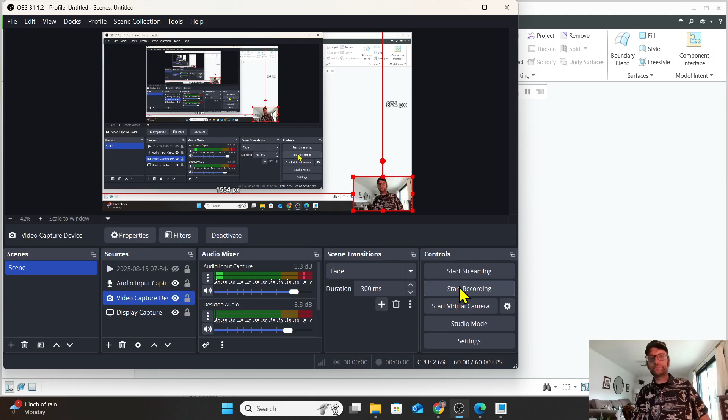All right, here we go. Exercise 3 has 2 labs associated with it. Let's take a look at those real quick. I'm going to give you help with one. The other one I'm going to leave up to you, and I'm going to probably go ahead and choose what I think is the tougher of the two. So let's take a look at those.

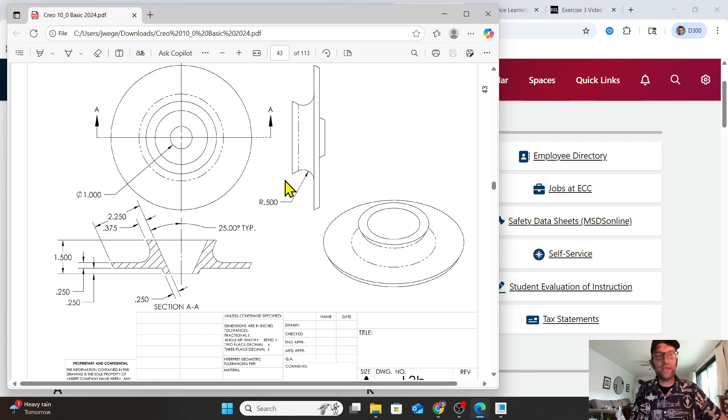So on page 42 of your book, we have L3 and then L3B. L3B, looking at it, it's really more practice on the revolve tool. So we get some more practice with sketching, refining our skills a little bit with that. But just remember with this one that you're going to sketch this section right here. Okay, we're going to get that really nice.

But first, before we start that out, let's go ahead and put an axis in here, a center line in here, and set those dimensions off of there that need to be set off of there. And then once we're done with this, then we're going to revolve that sketch around that axis, and we'll end up with that part.

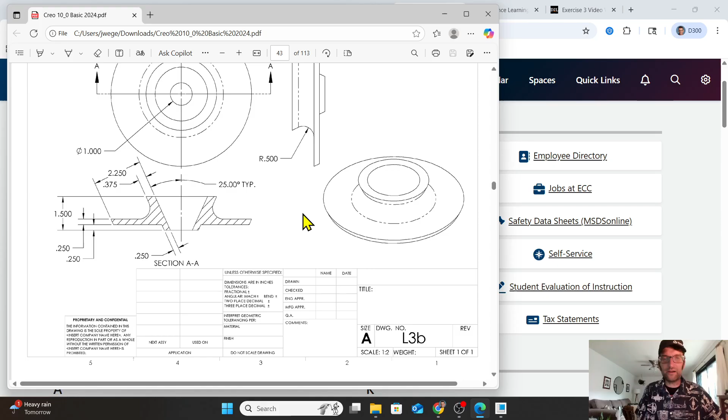All right, let's take a look at L3. A little bit harder of the two. We talked about some additional technical drawing things. We talked about the idea of multi-view drawings. We have one here. We have our most descriptive view up on the front.

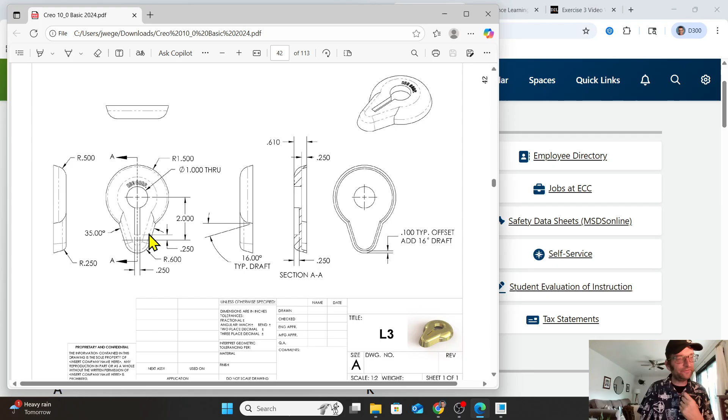Then we have the top projection projected from here up to show the top, here to the left to show the left side, here to the right to show the right side, and then the associated information. So let's dig into it a little bit. We have this primary view. Let's look at this. We have a radius of 1.5. We have a radius of 0.6 down here.

And I know this one is a little bit more crowded than some of the other ones, so we're walking through how to set this up. We have centers that are 2 inches apart for each of those radii. We have a 35-degree angle called out, which is going to be from here to here. Okay, because we have an arrow here, the leader there, and we have one there that's showing us that 35-degree angle.

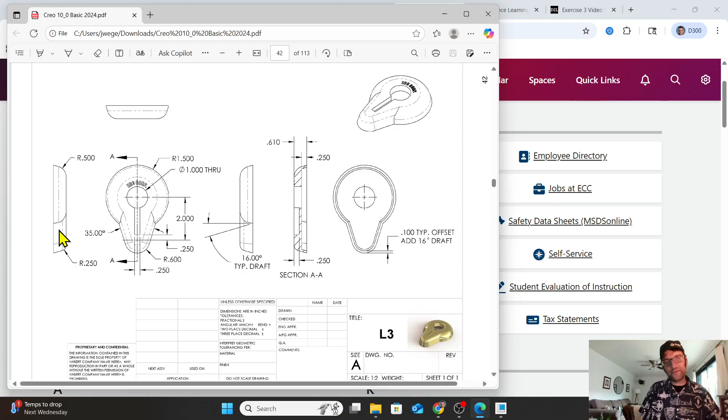And then when we look at the side, on the left side view, we see that we have some rounds. Okay, a half-inch round and a quarter-inch round. And if we look at this isometric view up here, we see that half-inch round. On that top edge of the part, we see that quarter-inch round here. And let's keep working our way around.

So on the right side view, we see a 16-degree typical draft called out. And that is showing us that there is an angle to this part that runs all the way around it. And we can see it when we go here. We see there's 2 steps in the side. There's the round 1/4 of an inch. This is that 16-degree of draft. Here it is right here, below where that round starts. So it goes all the way around.

Now coming over here, we see something new. We see the section AA. We also saw something a little weird on this primary view where we see a couple arrows. We see direction of an arrow, and then we see some letters associated with that. See how those match up? We have A, and then A, and we have section AA.

With section view, what it is, section view is where we choose a line. That's arbitrary. It's up to you to put it where you want it to be. And in this case, it is running vertically through the center of this part. And then that line we choose becomes a cut line. So what we're showing in the sectional view is that part cut right along that line, cut in half.

And when we cut a part in half, we're able to see the difference between what's solid and what is open. So solid and open is going to be shown by hatching here. That's going to be our solid. That's going to be the part of the part. So the metal of the part, if this was made out of brass, like it shows in the picture, this would be brass here.

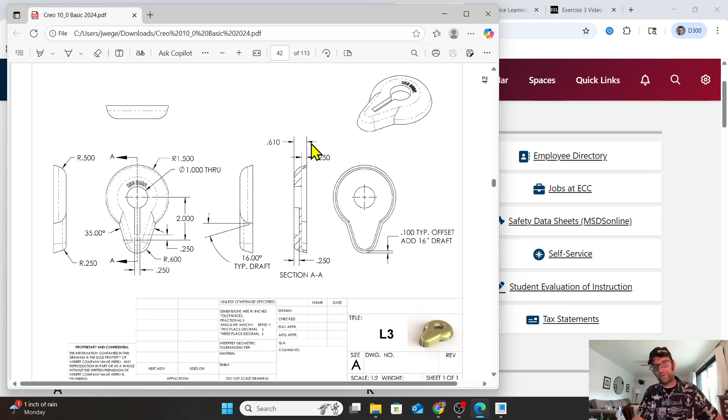And then we also see that pass-through hole, which is called out over here, 1 inch. Goes all the way through the part. And then we also see this little keyway, which is right here, shown on the top view, that primary view there, right there.

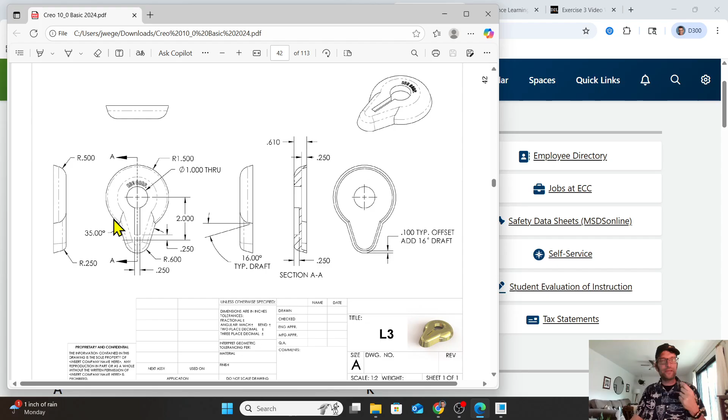All right, so let's work on this. We're going to start right here. We have 2 inches between centers, a radius of 0.6, a radius of 1.5, an angle of 35 degrees. Let's get into Creo and let's see what we can do.

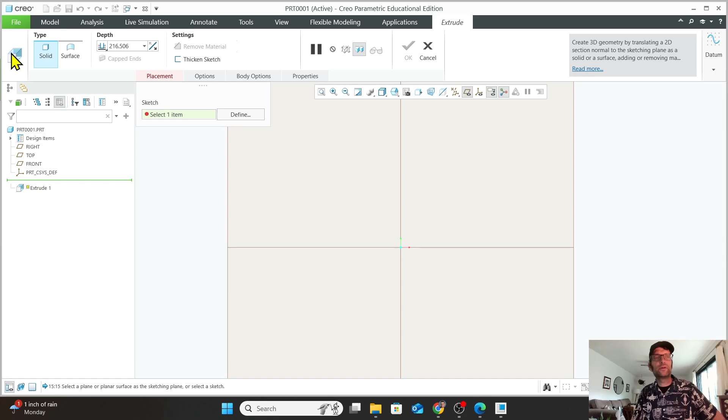All right, so we have a new part started up. Let's go ahead and just go right for an extrude. Okay. And we're going to cancel out of there. Let's go for an extrude. We don't have anything there yet, so let's go ahead and start with a sketch. Go to the front, click on that sketch, and let's get to drawing here.

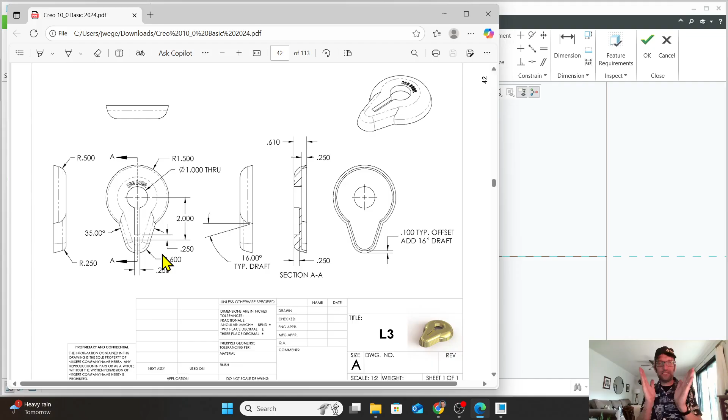All right, so first thing we need, let's get a center line in there, because we're looking at an angle that we've got to set up there. So let's just mirror one line to the other side, because the part is symmetrical one side to the other. And let's draw that line, making sure that it doesn't lock to anything else quite yet. There we go. Center click to end.

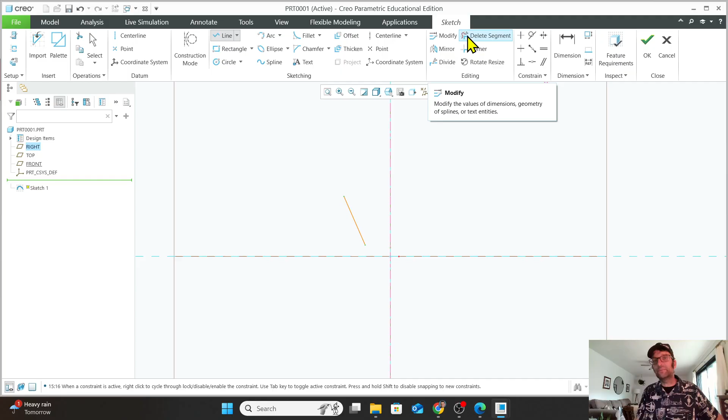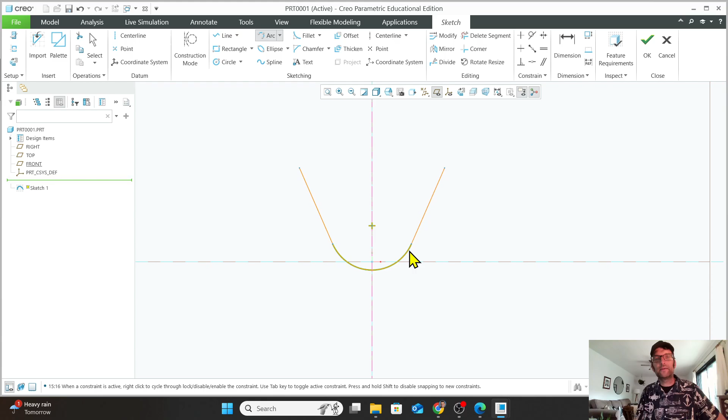Come on up to mirror. Click on that center line that we created. Come on up to the arc. Go from here to there. Okay. Lock that guy in. Let's double click. Let's get some dimensions in here. Okay, let's get this set right here. So let's get this arc dimension in there. Okay, and that is 0.6.

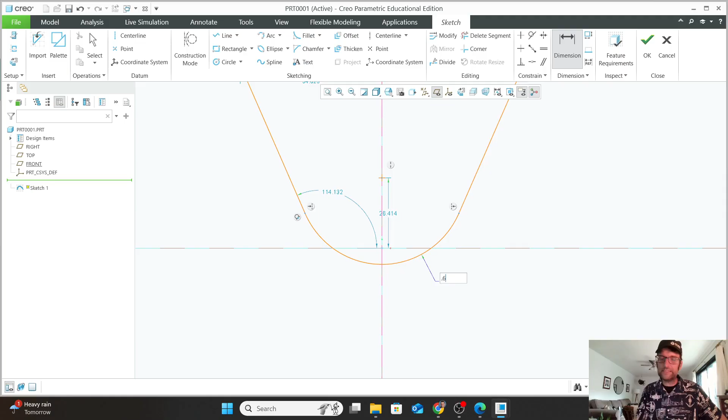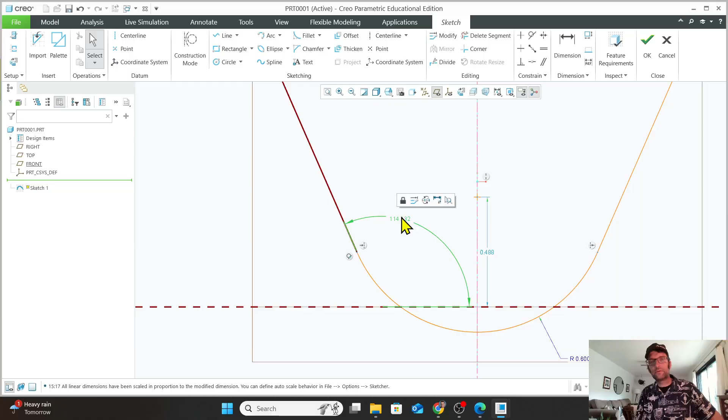Scales everything from there. Let's go ahead and replace this angle dimension because it's giving us an angle from here to here. We really want it from here to here. So we right click on that thing, assuming we get out of the dimension tool, so it's no longer selected. We left click on there once. And we get this replace, and then we choose here, here, come up, center click there, change that to 35. Okay. Good so far.

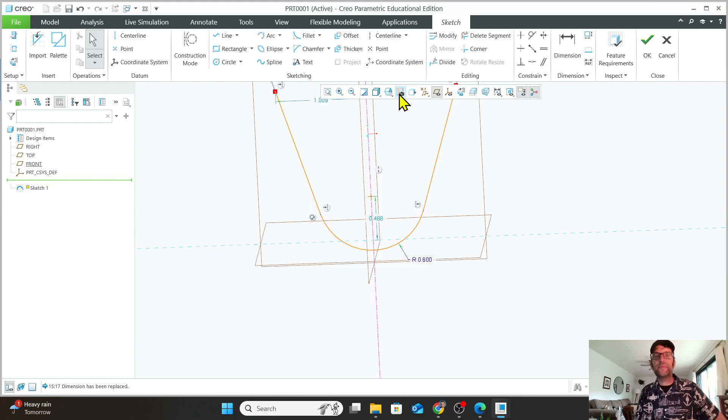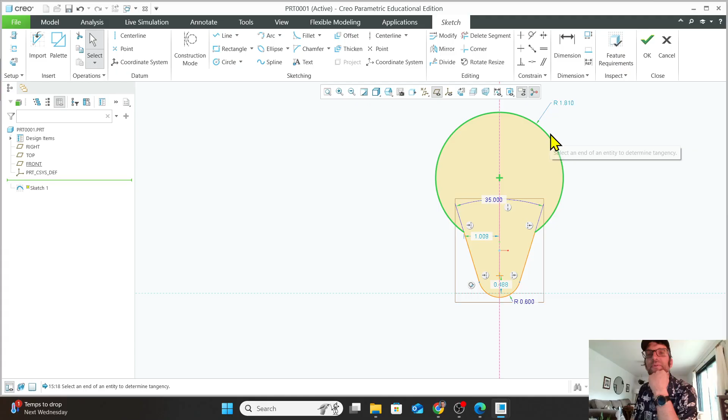Right, let's get that back to front view. Let's come in and let's draw that other tangent arc. Let's make it look like it kind of did in the picture. Now, the dimensions aren't quite perfect yet, but we're going to fix that. Okay. Let's double center click on the perimeter edge there, and let's fix these dimensions here. 1.5 for that one. We have 35 degrees, 0.6 down here, and then we just have to set up a distance of 2 inches from here to here.

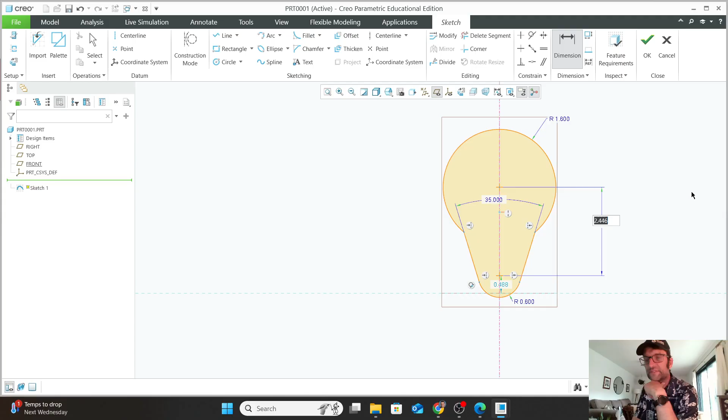So dimension tool. I'll left click on that center. I'll left click on this one. Right click off in space, 2. And we have our overall shape of the outer edge. Let's go ahead and finish that sketch. Let's turn it a little bit of an angle.

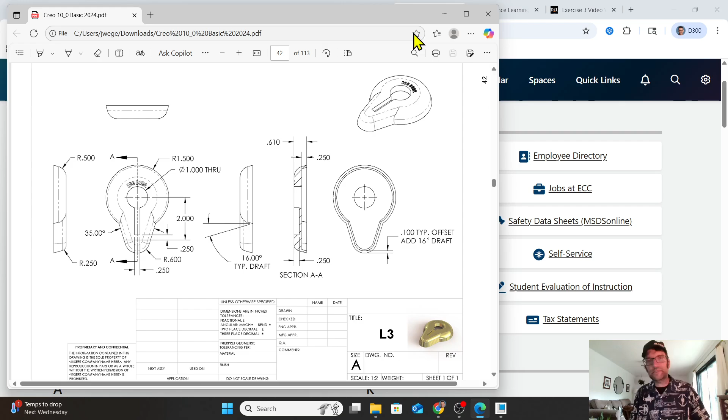Let's extrude. The thickness of the part was 610 thousandths, 0.610. Let's go ahead and put that one, 0.610. We also had a draft of 16 degrees. So let's go to the options. Let's add that taper in there.

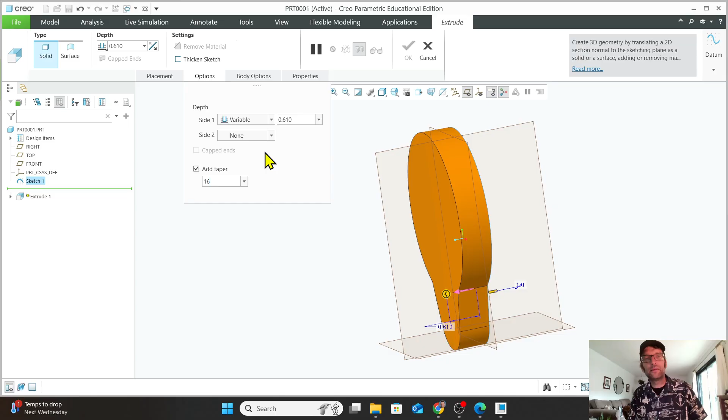Okay, taper 16. Make sure you go the other way, because that's not the way we want it to go, right? That's a plane there, so we want it to run that opposite way. So let's change that to negative 16 and enter. That looks a lot nicer. We're going to hit OK. And there we go. We got the main body so far. Now, there are a lot of different ways to go through and do this.

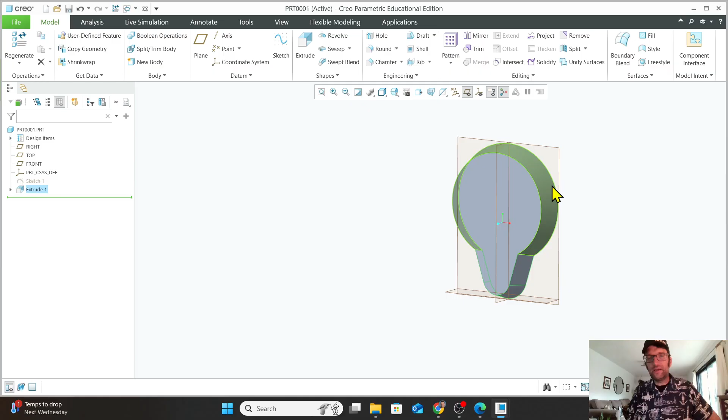Order can sometimes be very important. Sometimes it's not as important. In this case, I want to go and work on this feature on the back here where this is open, okay? And right away you might say, oh, you do the shell. But if we do the shell, you can't set an endpoint for a shell on there. At least I'm not sure of a great way to do that. So let's go ahead and create a sketch.

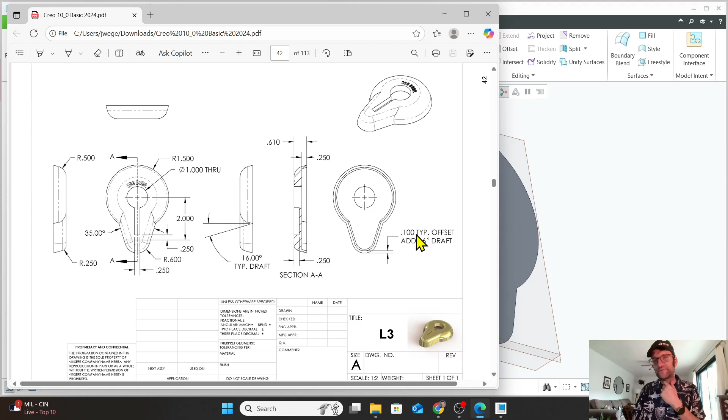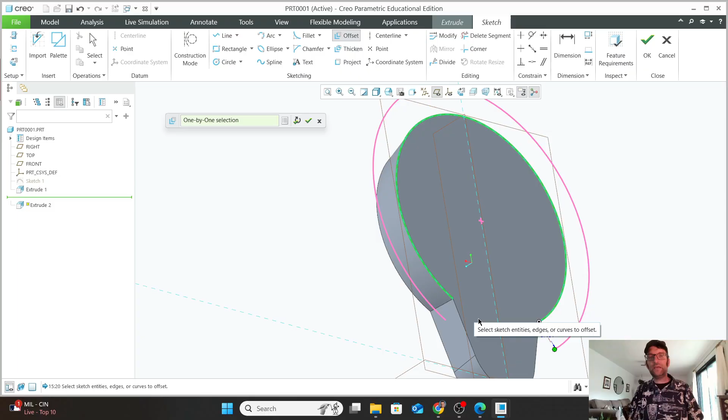So here's our clue. When we create that sketch, there is an offset of 100 thousandths and 16 degrees of draft. So let's go back here and do that extrude on this face. Okay. And let's go ahead and do the offset. Let's choose that first thing. And remember when we're offsetting, the selection of the rest involves using the shift. So we've got one selected. We're going to hold down shift, and then we're going to mouse over the other stuff.

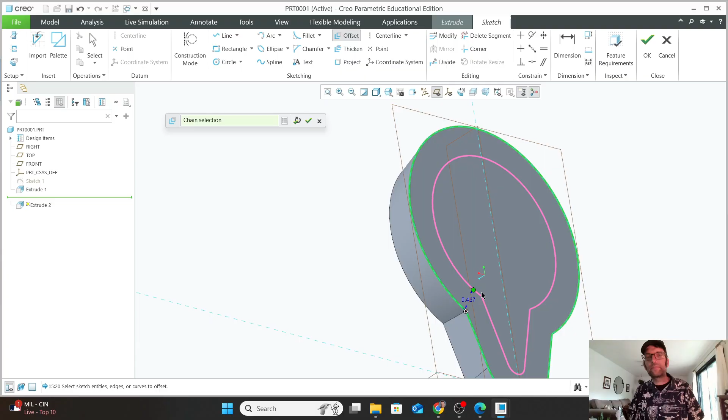Okay, our offset is supposed to be 0.1. There we go. So 100 thousandths. We're going to hit OK. And there we go. We got that. So the sketch is done. We're going to hit OK. Now we're automatically into the extrude mode.

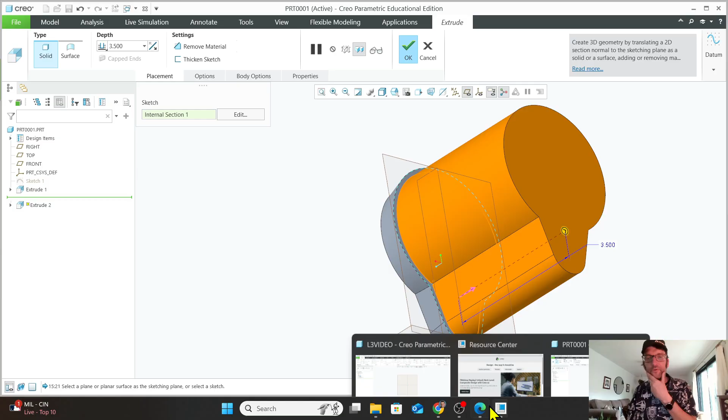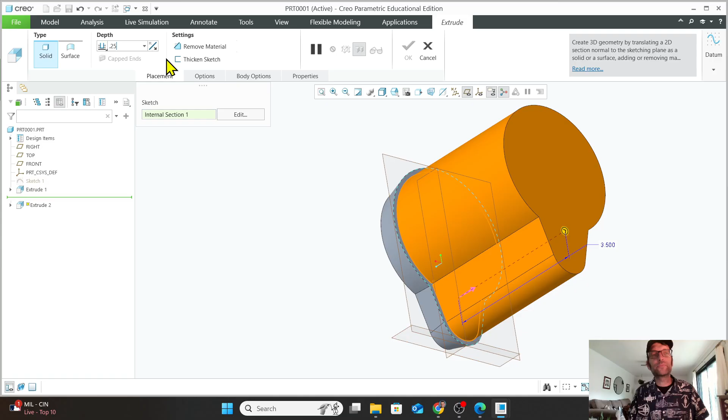And remember, we want to cut that to a depth of, what was it, 1/4 of an inch? Yes, we want to go 1/4 of an inch in. And it still needs to have that draft of 16 degrees because we want that outside wall and that inside wall to run parallel to each other. All right, so let's set that depth to 0.25. We're going to change that to remove material. Okay, so we got 0.25.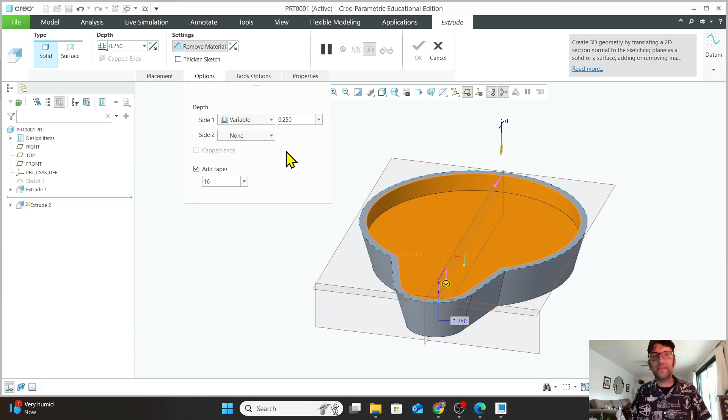Now let's make sure, though, when we look at this, I don't see any draft there. It looks like we're running straight up and down. So under options, let's add that taper. Type in that 16. That looks better. So we're farther out, we're wider. Our diameter is bigger here than it is here, so we're running the right way.

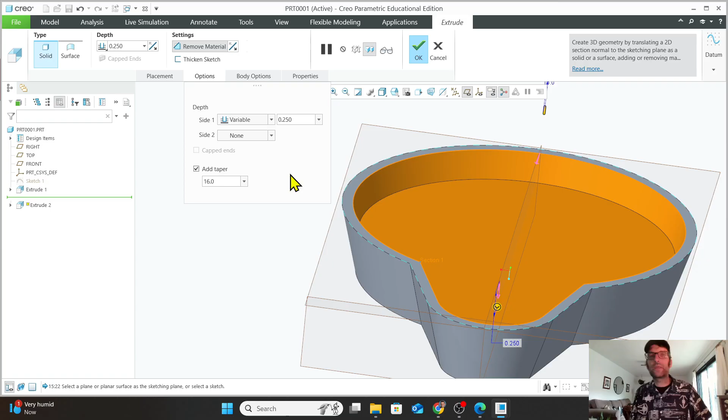If we were running the other way and it was too wide down here, we'd probably almost cut into the wall down here. All right, so we're good there. We have that on the back. Getting there. Let's go back to that standard orientation. Let's look at taking care of these radii here. So we have 1/2 inch around here, 1/4 inch right here. Let's go ahead and knock those out.

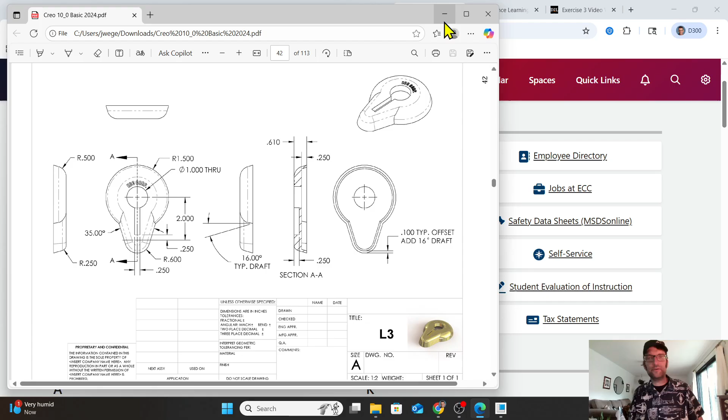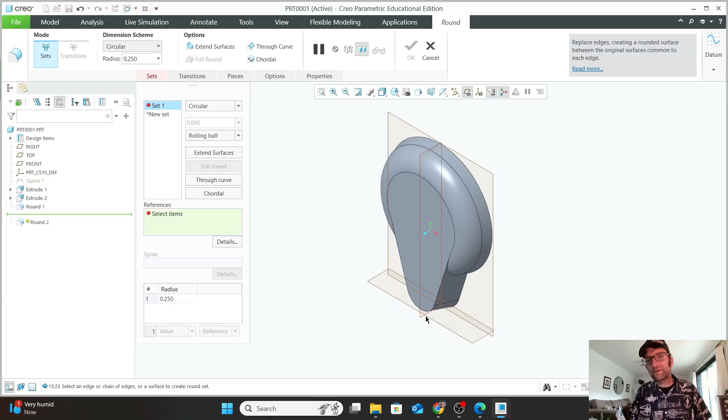Round, and we're going to do a 1/2 inch round, 0.5. We're going to click on just that edge, just that corner. I'm going to hit OK. Got that one done. The second one, that other round, is 1/4 of an inch. And let's grab that right there. Creo says, I'm assuming instead of just this, you want to go all the way around. And we say, thank you very much. We got that. All right, we're looking pretty good.

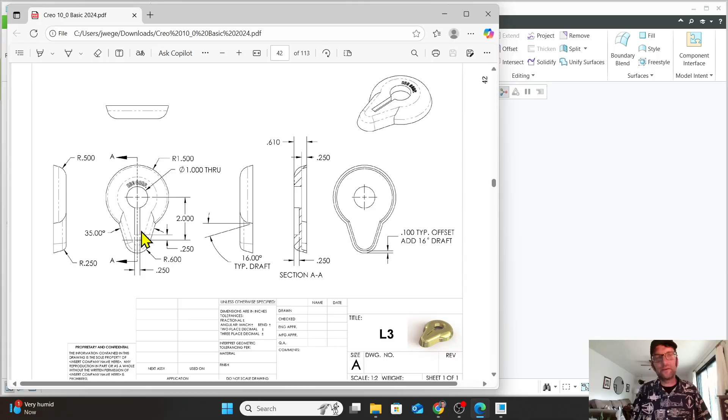Looking pretty good. So now really what we need to worry about is a couple things. We've got to knock out this keyway and we've got to do this pass-through hole. All right, let's do the pass-through hole first and get that one done. Come back to our front face. That one would be also known as the bottom face. We'll go with the front. Let's do an extrude right away.

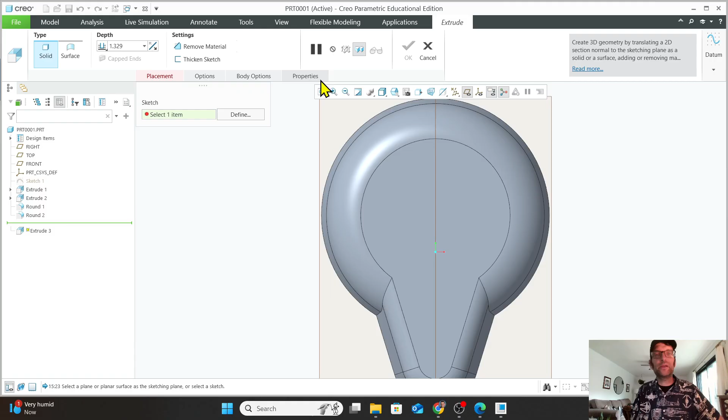Pick that face. Go ahead and do a concentric circle because we're going to be concentric to this guy right here. Okay, we left click to lock that in. And then it still wants to stay in that tool, so we're going to double left click to get out of there. Let's set the diameter of that to 1.

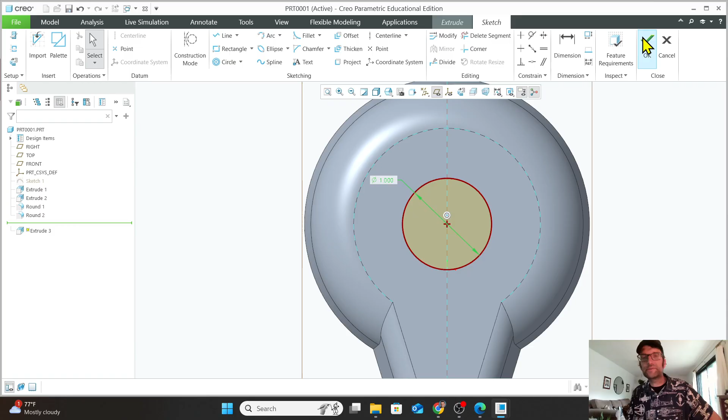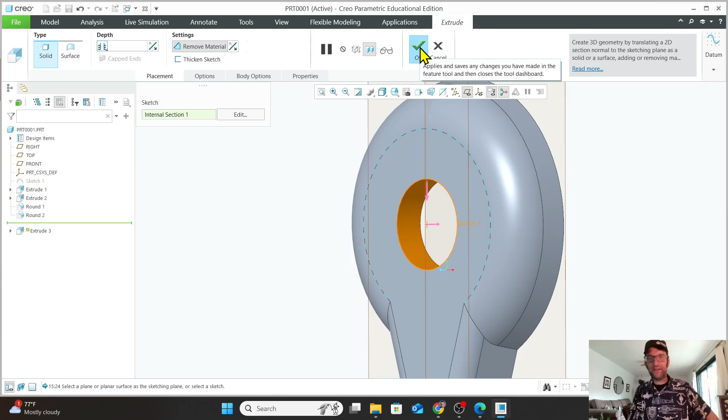Let's hit OK. Let's reverse that arrow. Let's make sure that we're always going through all with that one instead of just setting an arbitrary distance in there. So that way, if we make some changes to some other things, that hole is always going to be through. A lot of this stuff is going to make a little bit more sense when we get further into some of these things.

And you're going to say, that's why I was talking about that before, because it's not important now. Okay. Not hugely important now, but the more things we talk about now, the easier it is later when we get into those more complicated things, those more complex parts. And then we don't have videos that are 3 hours long, because some of these are long enough already by my own admission. All right, so to the front we go.

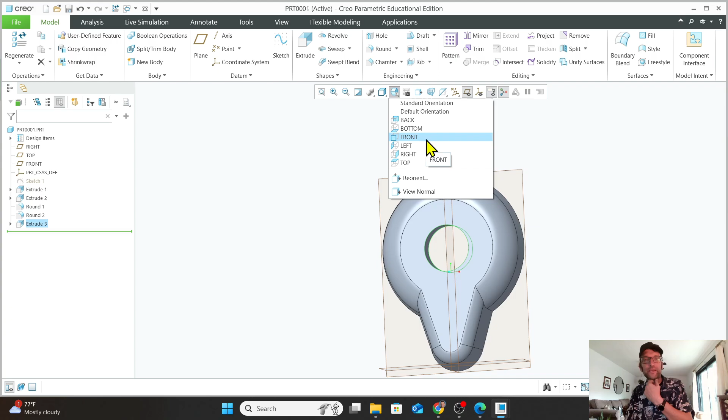And we have one last thing we need to do that's required, which is the key part. And then we can go ahead and put some text on there too. So let's go ahead and do another extrusion. We're going to go right here. Let's zoom in a little bit. Okay. And we're going to create a rectangle. And there are a couple different ways we can do this.

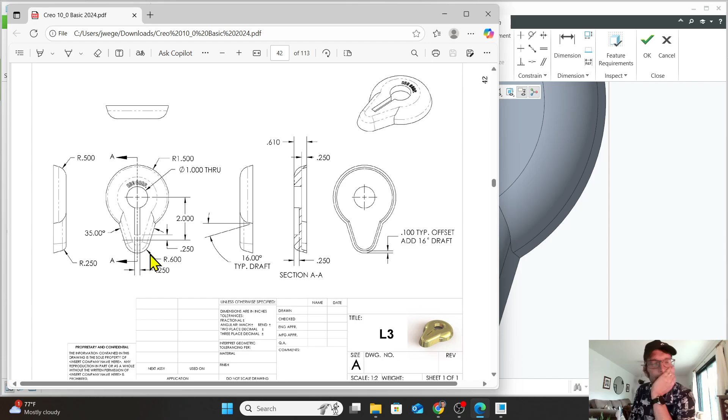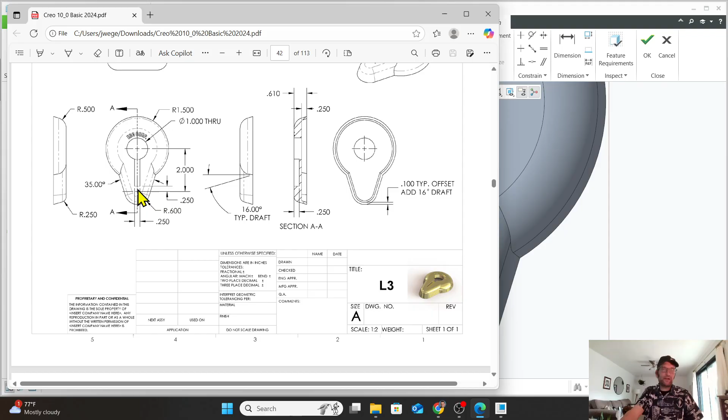We know that this keyway, when we look at our plans for it, it says that it's 1/4 of an inch wide. And we can see that it terminates where that pass-through hole is, and then it starts 1/4 of an inch from the center of this arc. All right, so that center of that arc, 1/4 of an inch up, it starts and it runs all the way into there, and it's 1/4 of an inch wide.

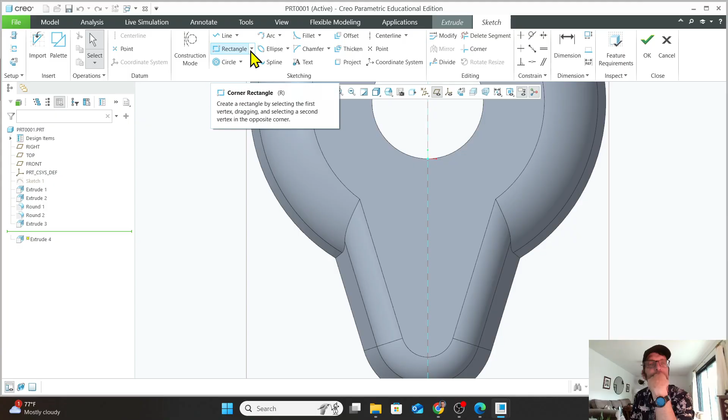All right. So there's a couple different ways we could do that, right? Let's do it this way. I'm going to do a rectangle like this, okay? And I'm going to draw half of this at a time. Okay, so I'm going to go like this. I'm going to come and bring this right here, right? And I'm going to go ahead and let's mirror. We love this mirror tool. Okay, we're going to get out of that tool.

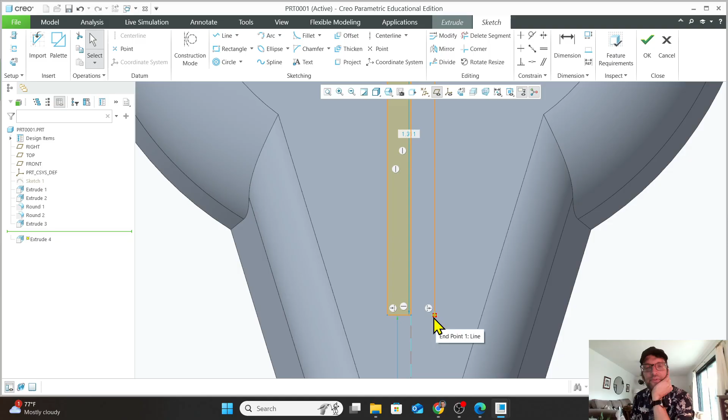We're going to mirror a couple of these things. All right, so we're going to mirror that on there. We're going to go across there. Let's make sure we mirror this too. See, we left something out. And this is another thing that bears repeating here. When we have these little red termination lines on here, we see when we have something that's a sketch that's closed, it gets shaded in with orange. That's something we can actually extrude and do something with. This is open and we can't do anything with it right now.

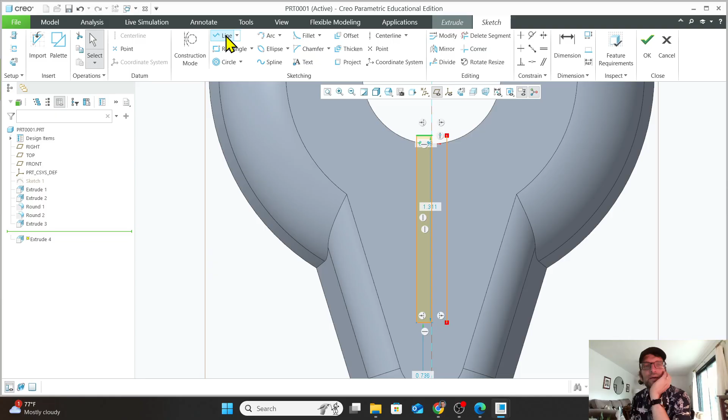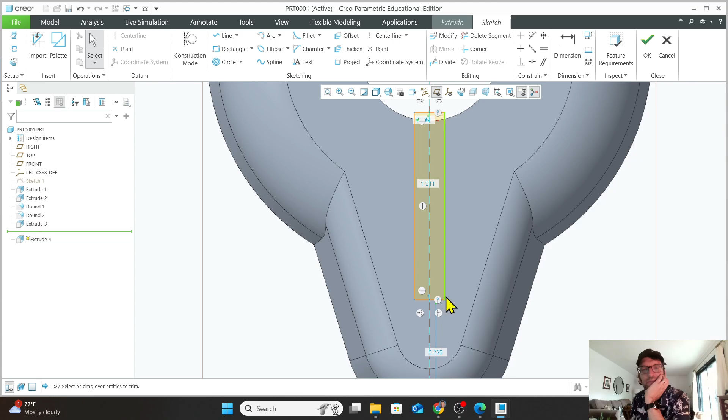So let's go ahead and hit OK. No, let's not hit OK on there yet. Let's go ahead and put the line tool on and let's go ahead and close this off. Okay, exit out of there. Still in the line tool. Left click, left click. Okay, and use that delete segment to get rid of that center line. And now, see, look at that. Now we get that solid. All right, so let's get some dimensions in here so that we can get this all set.

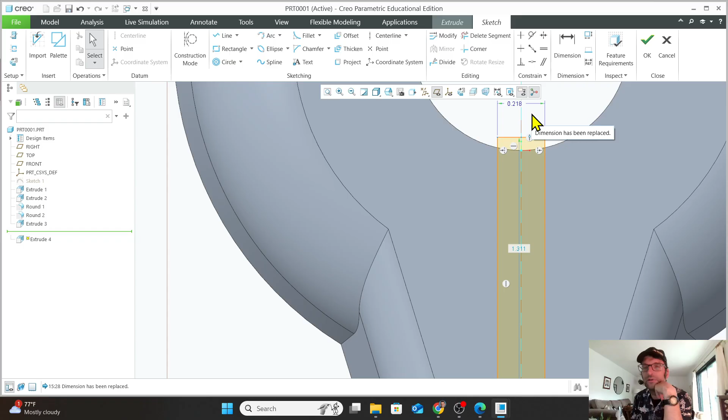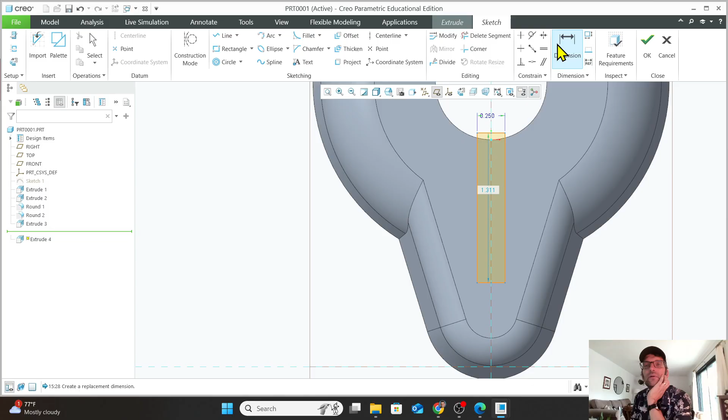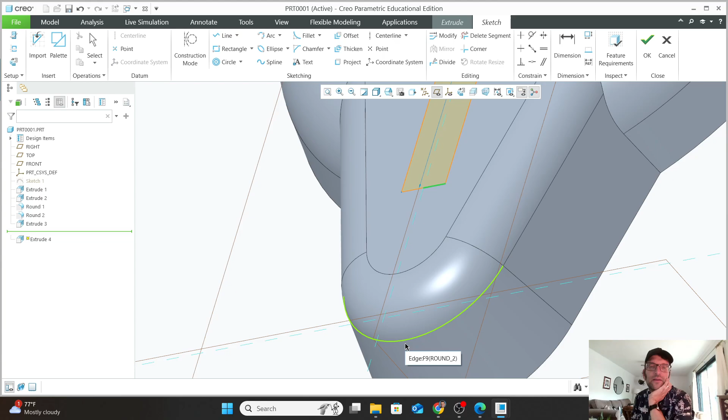Okay, why don't we just replace that one too, and then go from here. Let's see if that'll wake up. Let's change our angle a little bit. Oh, wake up, little center. We need that center of that arc. And it's not wanting to show it to us. Well, let's just exit out of that one real quick. Okay. See, when we click on there, let's go to the front.

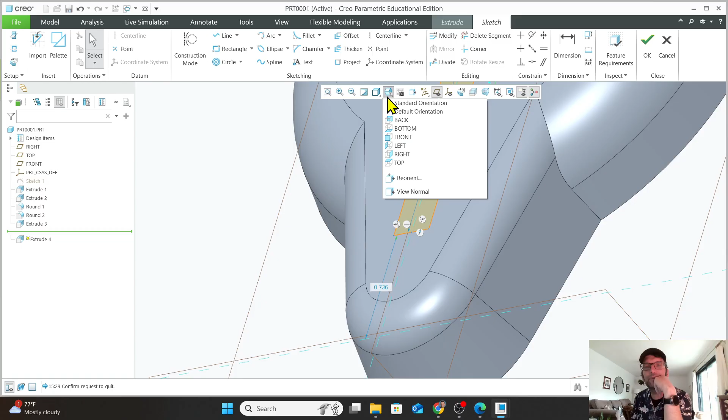There's always got to be something, right? There's always something. You're cruising along and you think, I got this, I got it done. And then something that is supposed to work doesn't want to cooperate exactly. And it can be very, very aggravating. That's right, though. We're almost done.

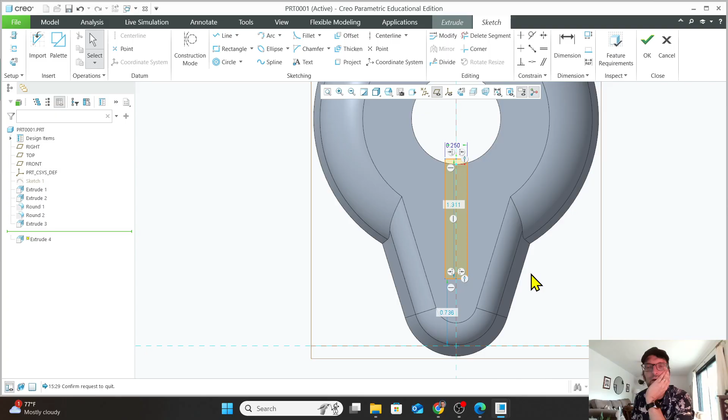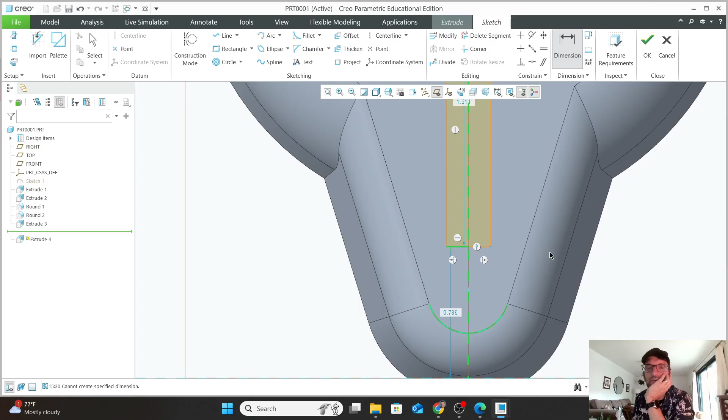So let's look at this. Let's go ahead and set that up and set the dimension from here to there. There we go. Now we got it to wake up. Over the side. Oh, nope. Dimension of that. There it is. The center to this over here. That gave us an angle. No, we don't want that one. Let's try it one more time here.

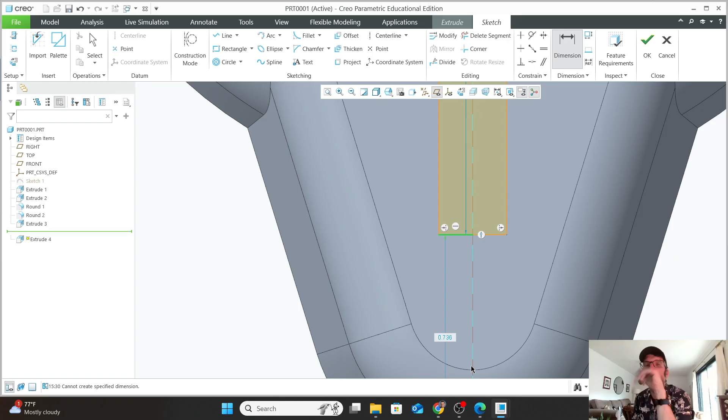Dimension of the center arc to here. That to that. This is one of those times where it's a little aggravating. We're just misclicking a little bit here. It gets to be a little bit off. Let's get rid of this dimension here. Let's even get rid of that one. I don't like that one being there. That one's been causing us some problems.

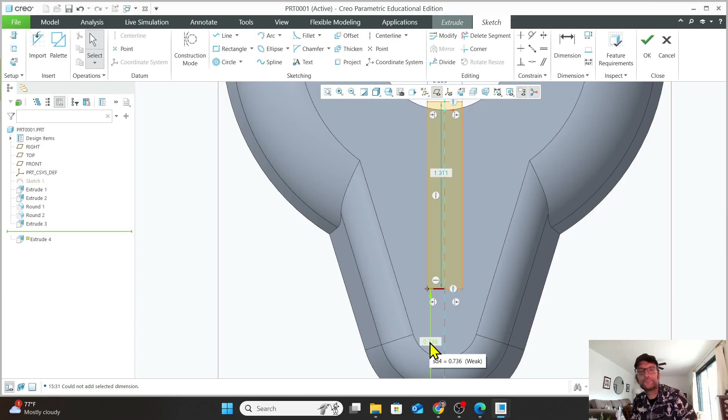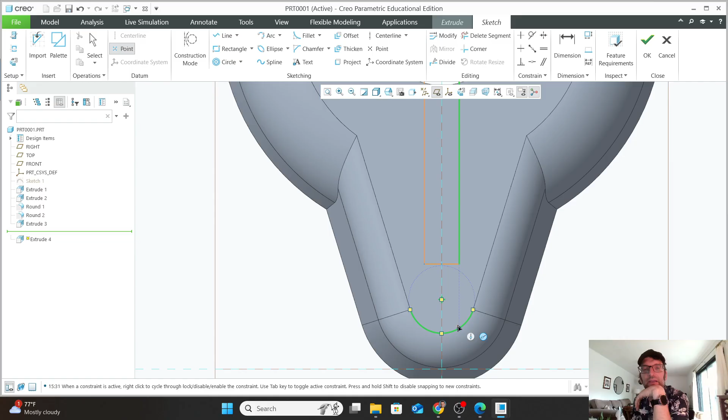Better yet, let's do something else. This is another one that's really helpful. Let's put a point in. So look at that. We'll go ahead and we're going to add a point, and it's a reference that we can use. So look at this. We mouse over that. Our center comes up like it's supposed to. There we go. We got a point there now.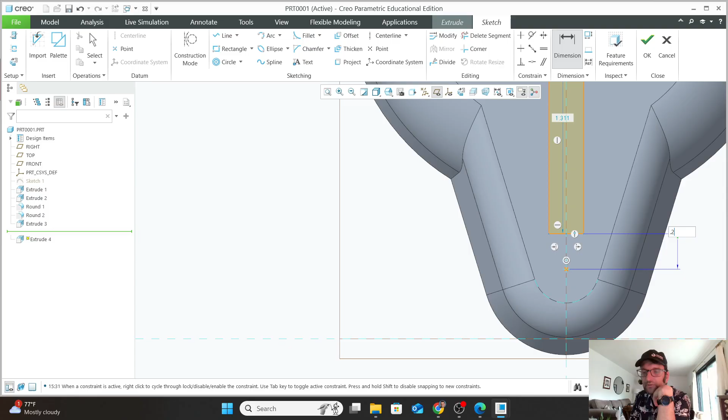Now let's go ahead and set this and this to be along with each other. So we can either set a dimension there, which is what we're going to do. We're going to do dimension from here to here of 0.25. Okay. And there it is.

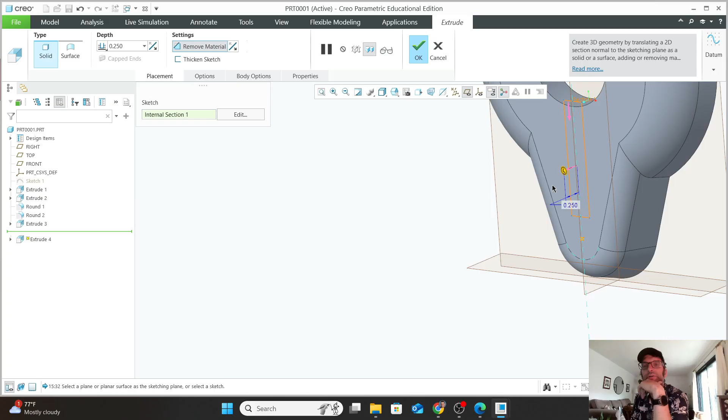We hit OK. We're going to go ahead and move that key depth and have it cut in 1/4 of an inch into our part. 0.25. We're going to remove material. We're going to flip that arrow so that we cut, and we're cutting out. We're cutting that keyway. We're going to hit OK. There we go.

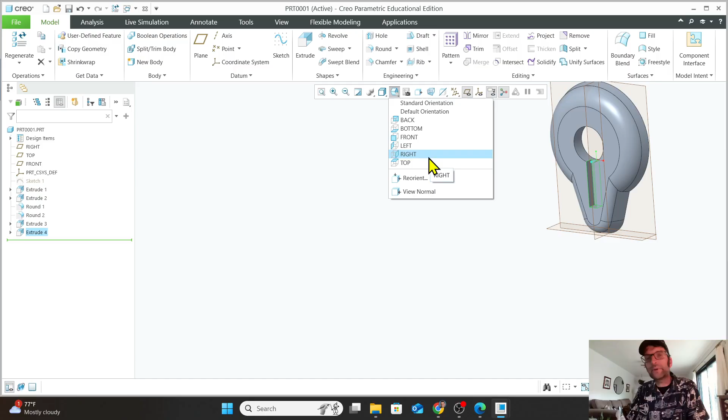All right, last thing. Let's go ahead and add one more thing here because it's got some text on here. It's worth looking at. Not a required thing on there, but it's a good practice. And sometimes it's not a bad thing to go just a little bit farther with something. So let's go ahead and do an extrusion on that face right there.

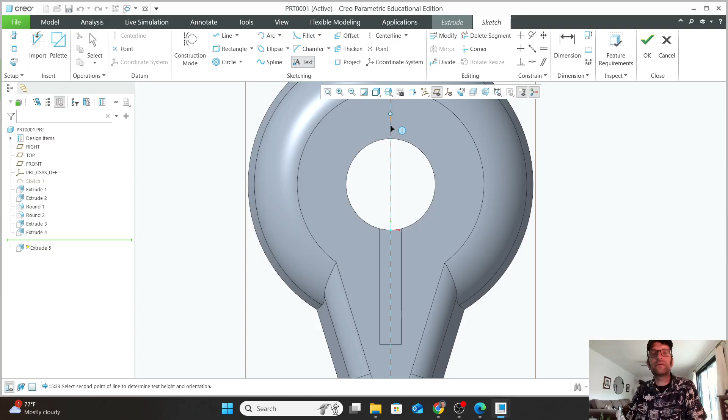Let's do a text. And the first thing we want to do is we want to go ahead and set how tall that's going to be. So we're going to draw a little line. We're going to click. Move this out of the way. So we're 0.13 inches tall is what we were setting there. What's our text going to say? Going to say ECC Corp, as it says on there.

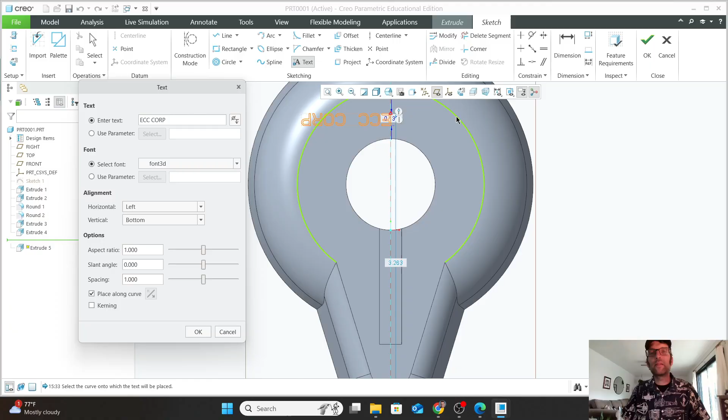All right, and then we're going to place along a curve. Place it along that curve. And we're going to get this lined up where we want it to be. So now horizontal, it's on the left. Let's center that up right there. And vertical, if we go to middle, we're going to be right on the middle of that line. Go on the top of that line and see what that looks like. Okay, it's more in the middle.

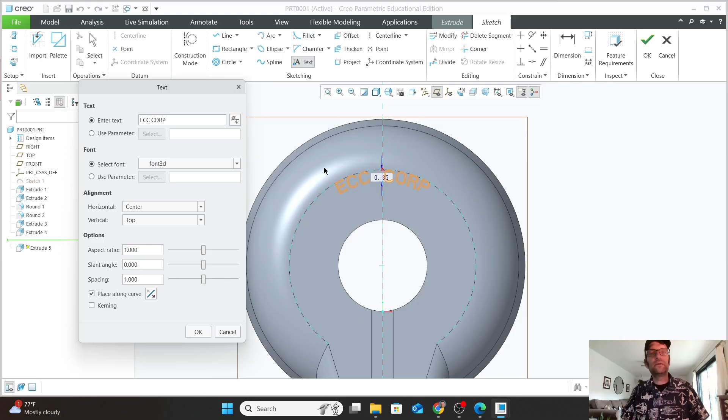Actually, in the example it's probably set up there, but that's okay. Let's just go ahead and hit OK with that. We're pretty happy with that. If we come back and we want to edit this again, if we click on this dimension, just like anything else, we could increase the size of that font to 0.2, which looks a little bit better. And hit OK.

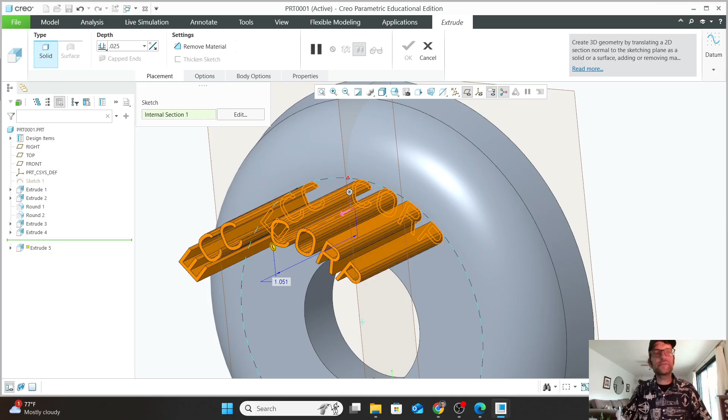Right into our extrude mode. I'm going to go ahead and deboss this. I'm going to go ahead and cut this out a little bit. So I'm going to flip this around. I'm going to go 25 thousandths in. I'm going to select remove material, flip my arrow around. And there we go.

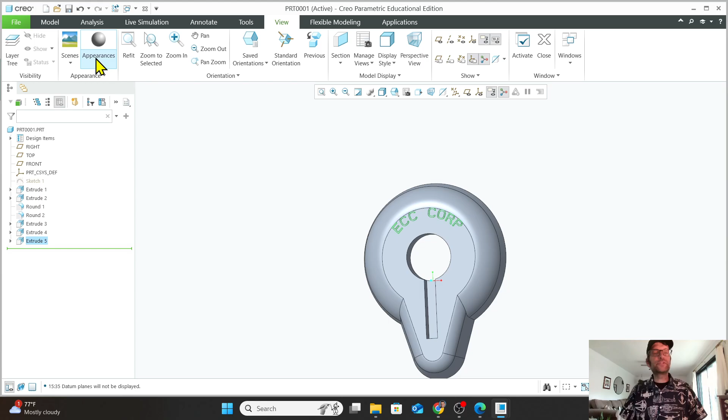All right, last thing, just to make it look like something, let's turn those planes off. Let's go into view. Let's change that appearance. Let's find a brass, polished brass, regular brass. There we go. And we're going to go ahead and draw a fence around the part. Hit that appearance. And there we go.

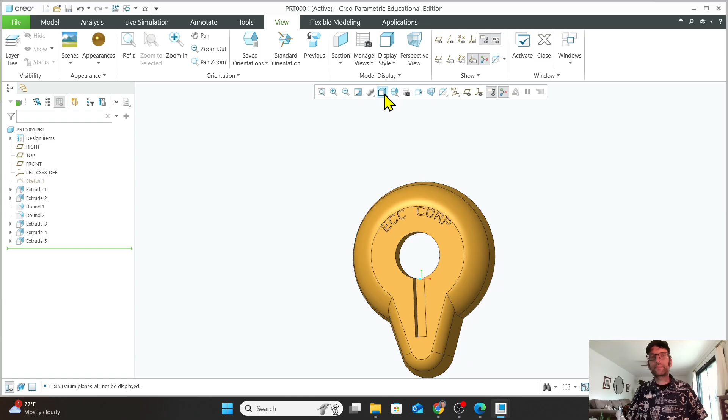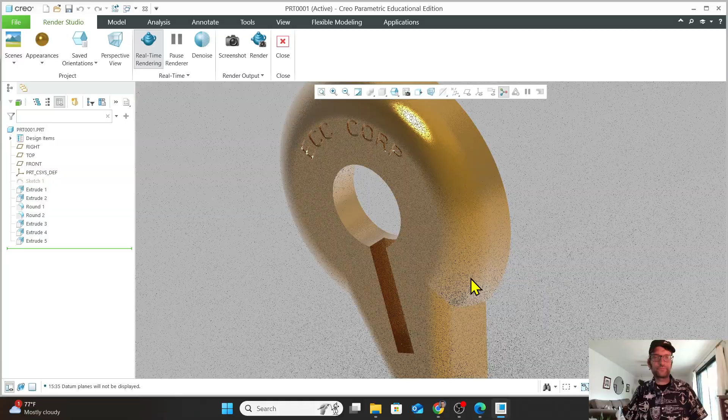Looking pretty nice. If we want to make it look even more interesting, we can go into Render Studio. Make that thing look even nicer. And then we hear the computer start to scream as the graphics card kicks up. All right, there we go.

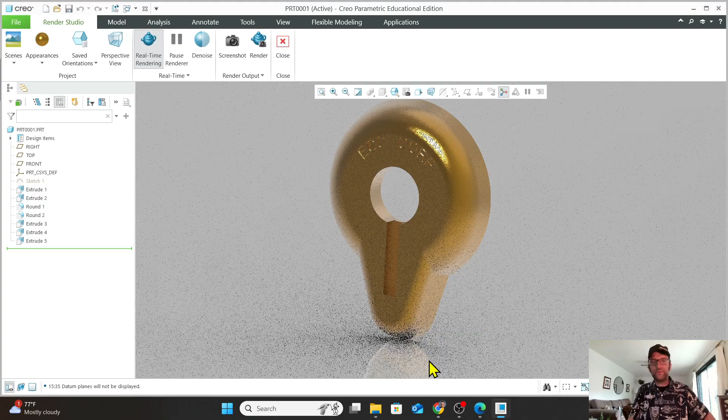Lab 3, L3 from exercise number 3, start to finish. You got L3B to handle on your own. Remember, you have that reference from Chris Sikora's videos as well, in case you run into some problems with that one. But I want to leave you guys working on that one on your own.